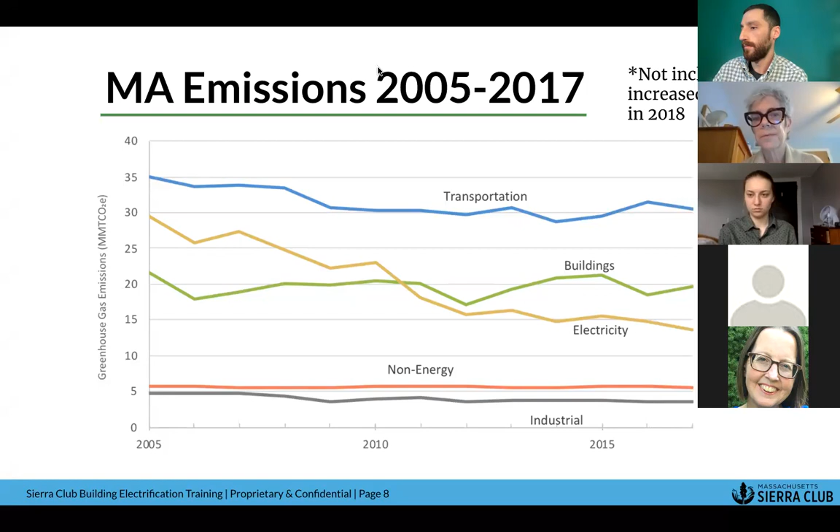The big takeaway is that buildings across the state of Massachusetts are the second largest source of emissions. Next slide, please. So why is that?

We're going to talk specifically in today's presentation on residential buildings and a little bit less so on commercial. In terms of residential buildings, the way people in Massachusetts heat their homes, primarily over 81%, basically 82%, heat their homes using fossil fuels of different kinds. The legacies around burning wood will continue to taper off, but electricity, in this particular graphic, is just over 15%.

So in terms of thinking about how to transform how we heat our homes, how we build our buildings, it's really useful to understand where we are starting from. And we're really starting from a place where fossil fuels dominate how people heat their homes.

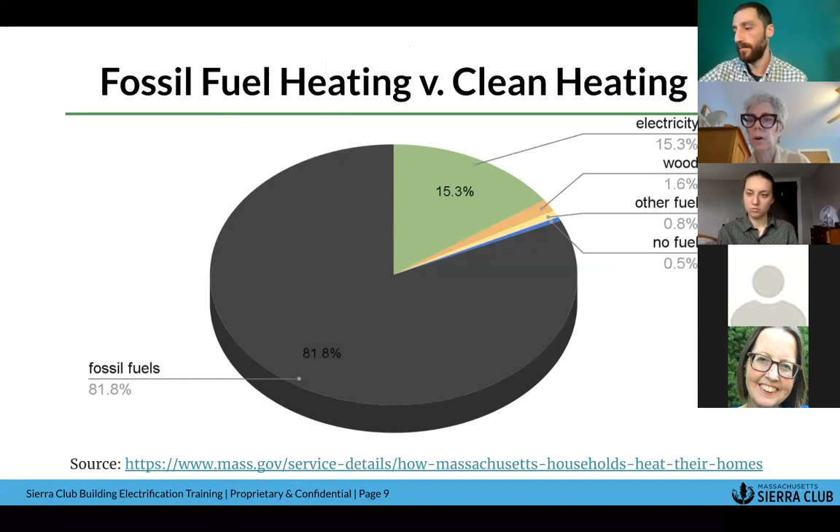Next slide, please. So what exactly is that heating profile for residential buildings? The majority of folks heat their homes with utility gas, Eversource, National Grid, over 51%.

Increasingly, however, even though we do have fuel oil and kerosene at around 27%, I have heard anecdotally from developers in central and western Mass that increasingly propane is being targeted as the fuel of choice for new development. So that's interesting.

So that is down there in the lower left, this bottled tank liquid propane option, 3.2% in this particular graphic, but we don't want it to expand in terms of its overall piece of the pie here.

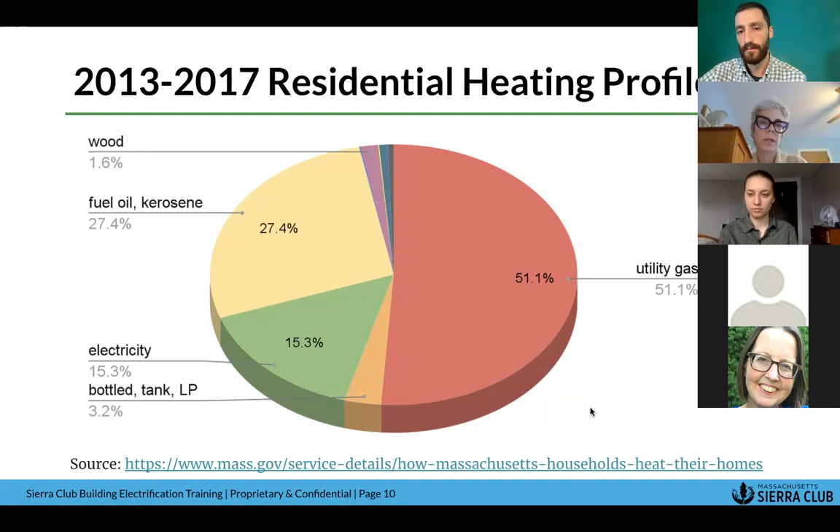And again, electricity only coming in at 15%. We really want to change the distribution of these profiles to really make sure that we have clean energy sourced for electricity. Next slide, please.

Massachusetts comes in just below Texas, whose major emissions are from cooling and transportation, and just above Minnesota. And we are only above Minnesota because we have more people. We're a densely populated state, and our residential heating profile is predominantly fossil fuels.

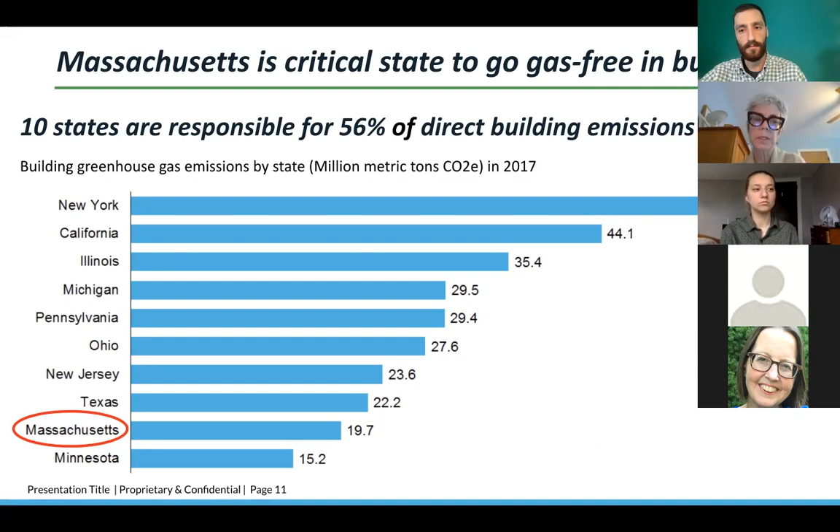So this is the larger context, both nationally and within the state of Massachusetts, of why buildings are part of the climate problem and how we can actually transform the building sector to contribute to climate mitigation. Next slide, please. So what do we mean by climate-friendly buildings?

As we have been already talking about, most of the buildings currently are heated by some fossil fuel or some non-renewable fuel source. The language around building electrification that Sierra Club is using here today really refers to the idea that instead of using fossil fuel to heat our homes, we can replace the infrastructure with all-electric, emission-free technology.

So building electrification specifically refers to switching out our appliances and making sure that they are all electric, everything from domestic hot water heaters - they've got to be replaced with other kinds of technologies - as well as our cook stoves. In Massachusetts, as I've been emphasizing, buildings are the second largest source of our emissions.

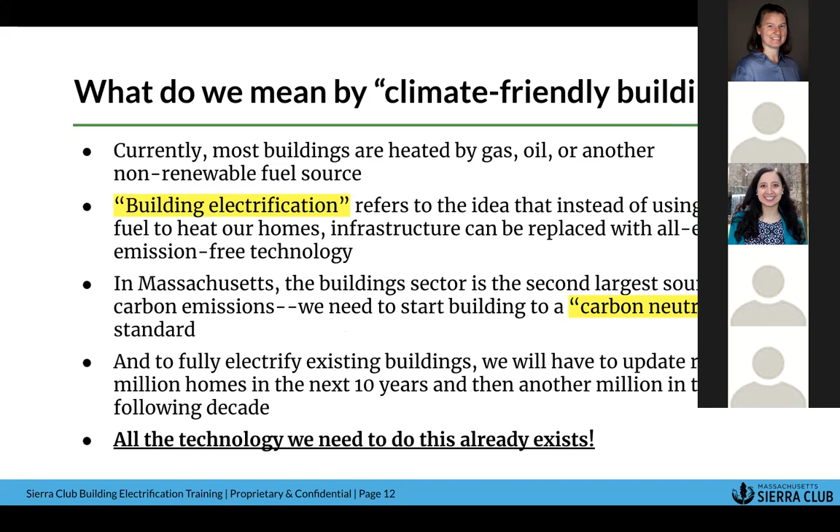And we really can use existing policy tools, existing regulatory tools to reverse this, to say buildings can actually be a major contributor to climate mitigation. And that's what we mean by carbon neutral.

So in order to fully electrify existing buildings, we will have to do an update, a retrofit, of almost 1 million homes over the next 10 years, and then after that first decade, another 1 million. This is a massive project.

So when we talk about building electrification, we're talking about new construction and retrofits. But the good news is we have the technology already to do all of this work.

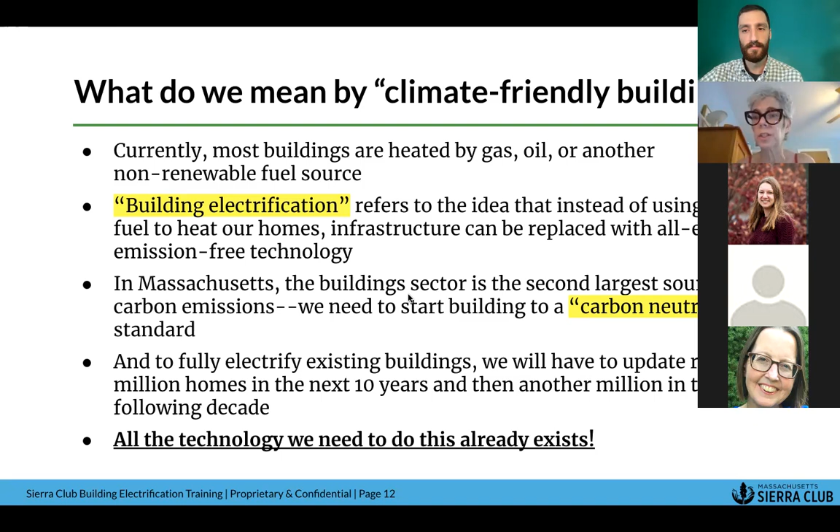Next slide, please. This just goes back to my last comment - this is a two-pronged approach. We have to address new construction, and we're going to talk about that, how we're going to address that through a statewide building code process called a net zero stretch code.

And then we also have to retrofit all existing buildings, not only residential, but commercial, industrial, labs, restaurants are really important, all towards getting to a fossil fuel free buildings sector. Next slide, please, Jacob.

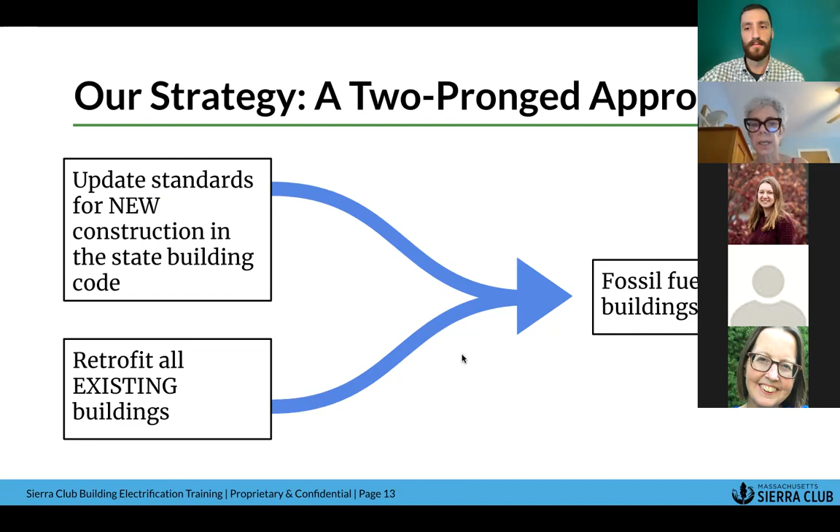So what is the problem with gas? I grew up with gas, I loved cooking with gas. For someone who cooks a lot, you can control the flame—it's really appealing, but it's a huge problem.

There are many aspects to touch on. Very broadly, natural gas has safety risks associated with it, including explosions inside people's homes resulting in death. There are also public health challenges, especially for folks with pre-existing asthmatic and upper respiratory problems, and persistent carbon emissions. We're really talking about trying to reduce carbon emissions within the building sector, and that starts in our homes.

So, the health impacts of fossil fuels in buildings. This was a study done by the Rocky Mountain Institute that I referred to earlier, where they looked at the air quality impacts of building emissions in Massachusetts for the year 2017. This is a snapshot in time, and for that particular year they calculated the number of early deaths—people who died statistically before expected. In the residential sector, they calculated 570 people died in 2017 alone.

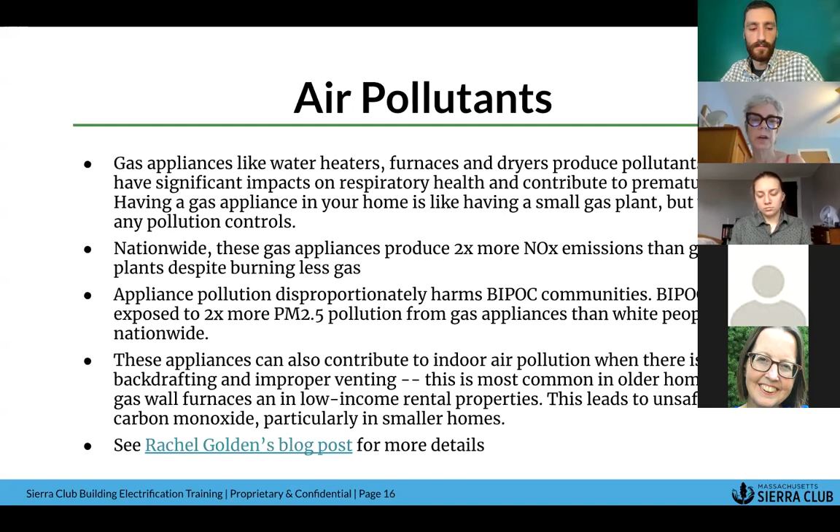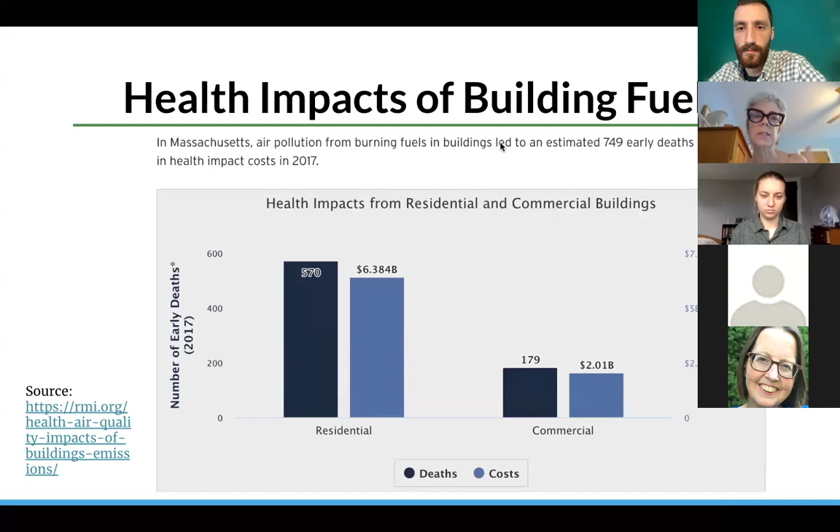So we've already done this slide, really getting clear on the health impacts now that we have this larger framing about the kinds of air pollution that is indoor air pollution generated by gas fired appliances.

The other safety risks are associated with explosions. For those of you who were around in 2018, there was excessive pressure in the Columbia gas lines that resulted in a series of explosions and fires in as many as 40 homes in Lawrence, Andover, and North Andover. In fact, one person was killed, and over 30,000 folks were forced to evacuate their homes immediately.

This doesn't happen very often, but it is a risk. And even though the Columbia Gas Company did reach a settlement of $80 million for these affected communities, these residents still live with the impacts of the explosions of their homes, as this image clearly demonstrates. Rebuilding, refinancing, and especially losing a loved one have long-term impacts. So gas is not safe.

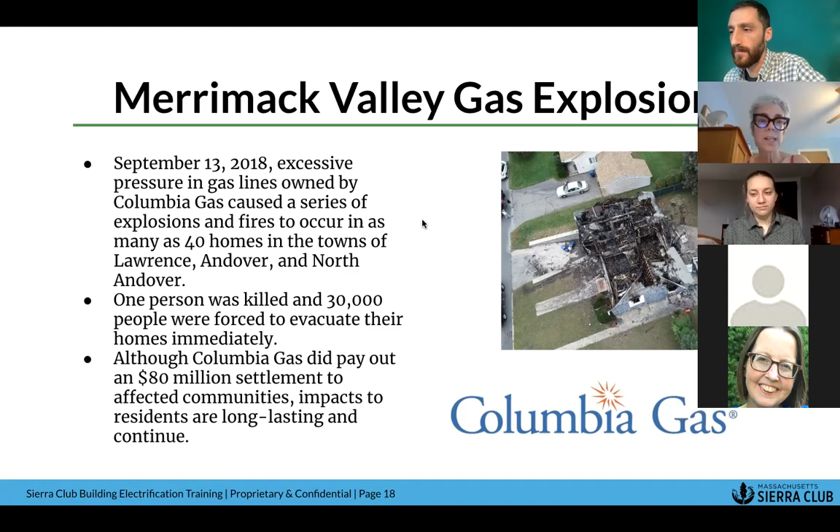Next slide, please. And in fact, as many of you know, gas is exacerbating the climate crisis. From a New York Times article in 2019, new data show that natural gas is the biggest driver of emissions globally in recent years. And if we want to get to net zero emissions by 2050, which is what the Next Generation Roadmap Bill now mandates, we have to specifically address natural gas in our buildings.

Part of the challenge is that gas companies connect at least one new house to gas every minute, totaling over 560,000 new gas hookups every year nationwide. So that's nationwide, but we're talking about Massachusetts. And another challenge is that the methane emissions from gas are part of the problem.

Methane is even a more potent and volatile greenhouse gas, and it is consistently underreported. So gas consumption across the United States, and these are 2018 data, show that buildings are just above industry and below power plants. So these are the three major sources: power plants, buildings, and industry for consuming gas.

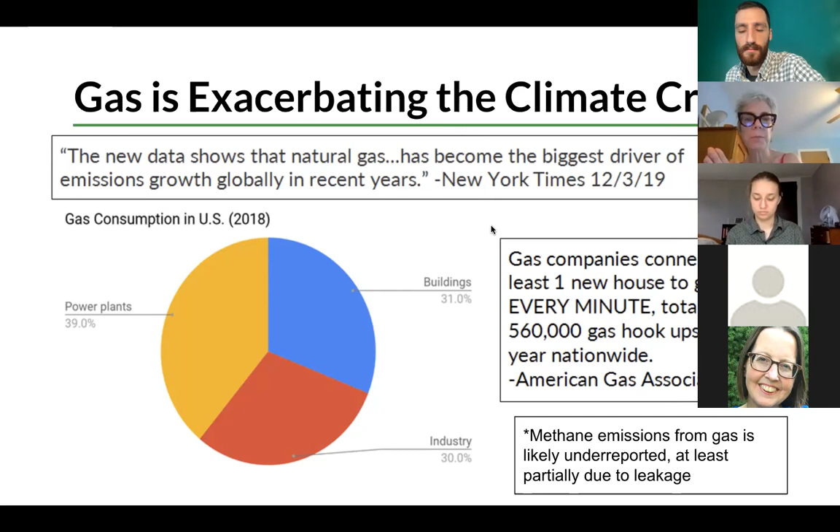That's why, once again, buildings are part of the problem now, but they can be part of the solution. Next slide, please. I do want to talk briefly about a technology that is gaining more mention in mainstream media, like the New York Times. And this is hydrogen, although oftentimes it's put in air quotes, green hydrogen.

Currently, hydrogen is used in all kinds of industrial processes. It does hold some potential for decarbonizing parts of our economy, related to energy storage, related to thinking about how to do long distance transportation for both ships and trucks. That's not part of the building sector. And then thirdly, in terms of manufacturing high heat, not part of the building sector.

There have been groups like the Clean Energy Group out of Vermont, and other groups that emphasize that there are so many unresolved challenges to truly understanding hydrogen and the risks associated with it, to make it currently a viable option for the building sector.

So for example, hydrogen is very volatile. It has a very different ignition profile. It behaves differently in fires compared to natural gas. So right now, there is not one firefighter in the state of Massachusetts that is certified to put out a hydrogen fire. And this relates to safety.

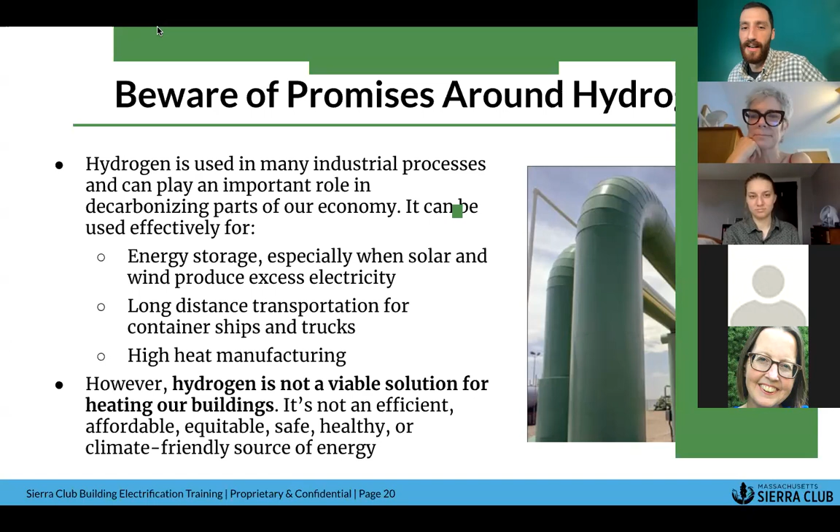But I'm going to move us along here. We're going to talk a little bit about what it means to electrify our homes and businesses, and what does a carbon neutral or net zero building actually look like?

So first and foremost, some of the benefits of electrification. We heard a minute ago about some of the downsides of gas. This is the other side of the coin. What are the benefits of electrification? There are more than this, but this is definitely the short list here.

Affordability is probably the one that comes first to mind. If you aren't paying a gas bill, that's one less utility bill to pay, which means more affordability in the long run as electricity prices continue to drop with offshore wind and additional solar coming online. That's going to mean lower monthly bills for residents.

Certainly not burning gas and switching to emission-free electric heating is great for the climate crisis. I think we covered that. Likewise, Sarah really did a great job talking about some of the health and air impacts of not burning fuels in your home. Maybe unintuitively, really efficient homes are some of the most dangerous homes to burn gas in because there's not enough airflow. So ideally, we want really efficient homes that are really cheap to heat, but then are heated with emission-free, pollution-free technology.

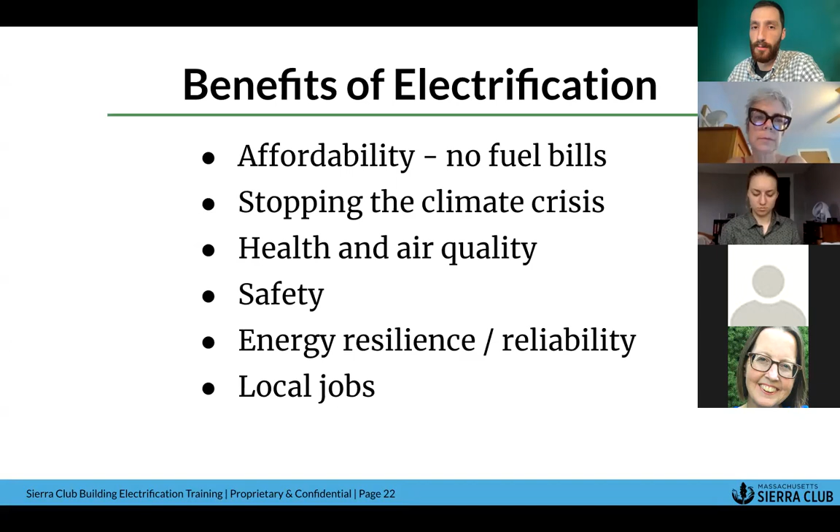So before I move into some of the nitty gritty here, I just want to talk for a second about equity. Anytime we're proposing a change in our economy, a change in the way we do business, it's really important to think about who is being impacted, and especially how the most vulnerable residents are impacted by such a change. From Sierra Club's perspective, we believe it's very important that we move low-income residents off of gas first.

Otherwise, they will be saddled with the cost of a shrinking system. Basically, we anticipate that electric heating will continue to become cheaper and cheaper, while gas heating will become more expensive. We have a climate bill right now that basically mandates us getting off of fossil fuels and moving to emission-free technology. If low-income residents are the last ones still using gas, they'll be paying for all that transmission and all the infrastructure related to the gas system beyond just the cost of gas in their homes. So really making sure those are the folks who have the benefits first is really important.

And also from an equity perspective, we want those folks who have less means to have smaller bills and be able to afford their living situation.

What we advocate for is for communities who are looking at pilot projects or something more expansive soon to partner with your local affordable housing, labor, and other equity groups to figure out how you can build a program in an equitable way. I think the things that we all really want to avoid are updating a house to make it really efficient and use all clean heating technology, and then displacing the residents, either because their landlord kicks them out to do the upgrade, or they can't afford the rent.

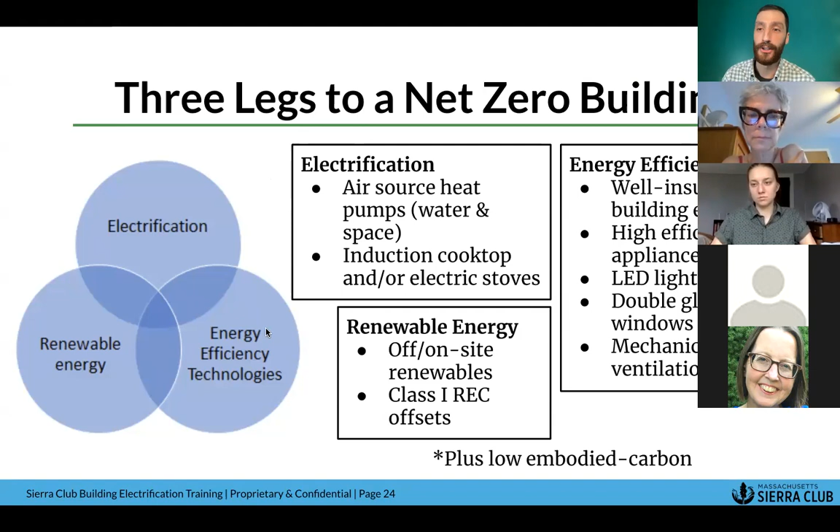I understand where that's coming from. They do work, and they don't pollute like a gas stove. I've had a lot of fun researching induction cooktops and heard some really exciting stories about how that technology is developing. We're not going to talk much about cooktops in this presentation, but happy to connect with folks offline and talk about cooking. And the last thing is renewable energy. Of course, we want to be building buildings that have on-site or off-site renewables.

So I think the short definition here is very simple. We want a building that is using very little carbon to operate, and also what little carbon it is using is being offset by a renewable generation. Ideally, a building will also be built with very low embodied carbon, so thinking about the building materials that we're using.

Sarah, I guess I was going to toss it to you for just a minute here if you wanted to say a few words about embodied carbon.

Great, thanks, Jacob. So embodied carbon is gaining a lot of traction in the building and design fields as something to include in our conceptualization of a net zero building. As Jacob mentioned, the very first thing to do is to make sure that if we want a building to be truly net zero, we really maximize the structural efficiency, make sure that building envelope is tight. And in doing that, really focus on using, if it's a concrete building, low carbon concrete mixes. There's a lot of work happening right now in that area.

Limit the use of carbon intensive materials, and there's a long list if folks are interested that I can send you about what those materials are. More importantly, reuse existing materials, choose materials that have lower carbon involved in its sourcing and production, and minimize the waste. It's really trying to recycle, reuse, and minimize waste, but it all starts with really maximizing the structural efficiency of a building.

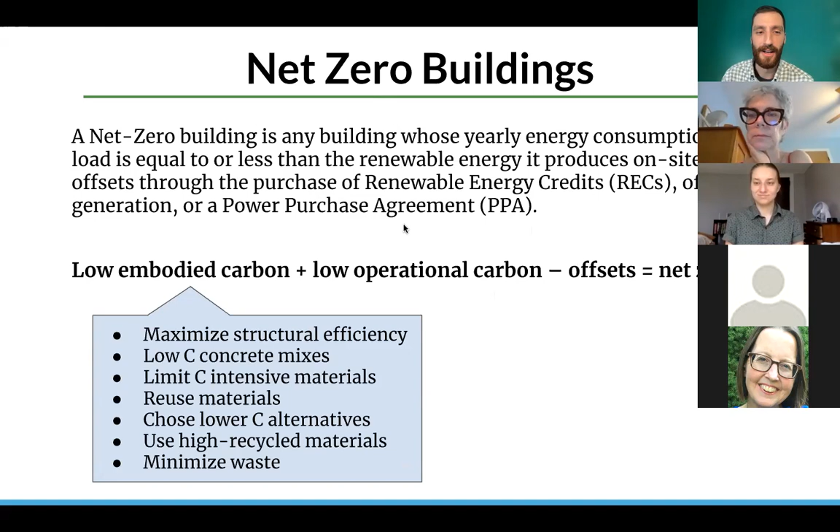Thanks so much, Sarah. Sarah is definitely, by comparison to me, the expert on embodied carbon, further along the learning curve. So I'm going to very briefly show this video. I'm assuming this will be review for some folks, but it's just about a minute and a half. A question I often get is, how does this technology actually work? Hopefully this very short video will answer those questions. If you all bear with me one second here.

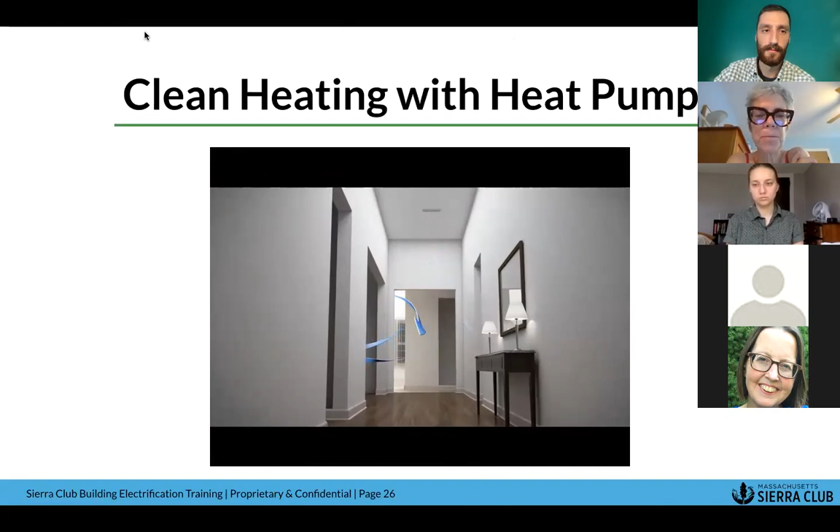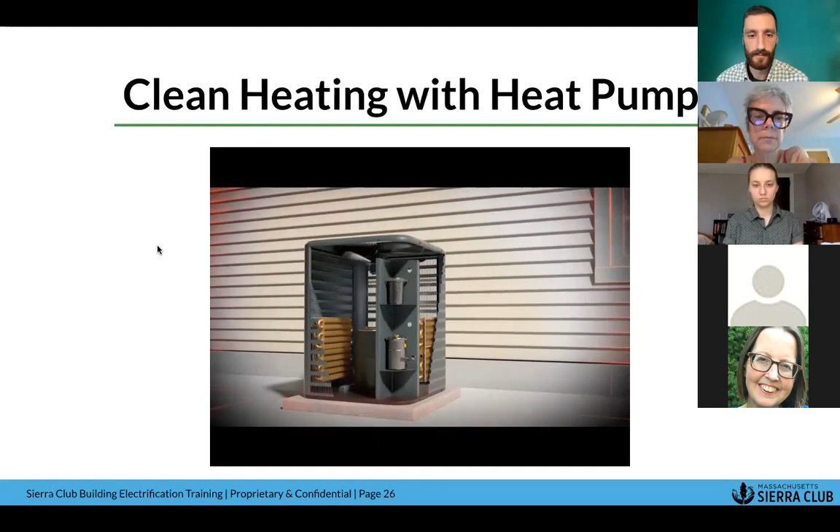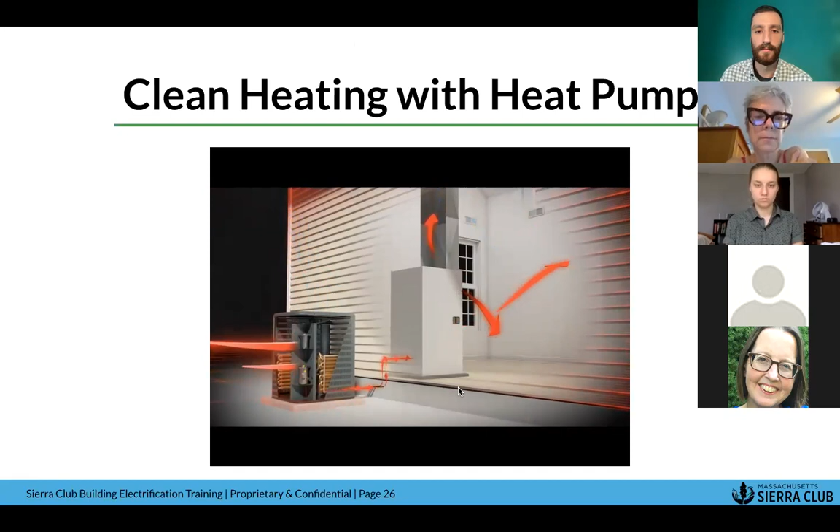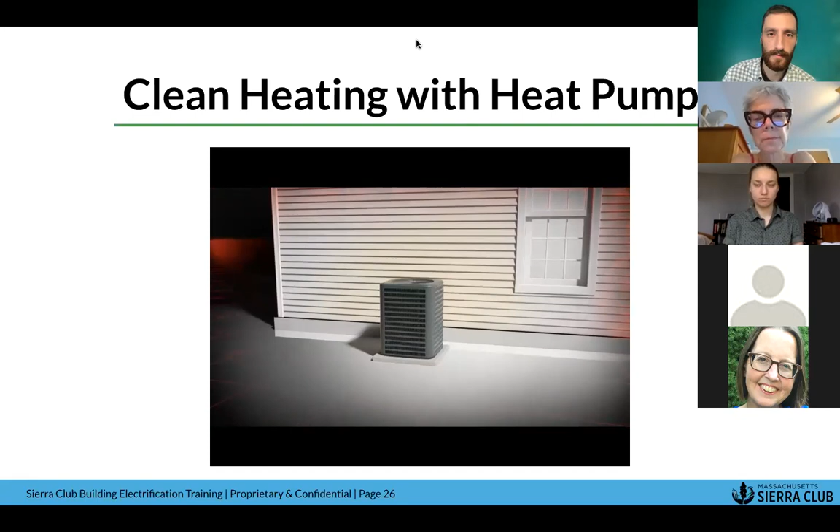Heating and cooling your home accounts for more than 50% of the average monthly utility bill, so it's important to make smart choices when considering a new heating and cooling system. A heat pump is the most efficient heating and cooling system available today. That's because rather than generating heat, a heat pump simply transfers heat from one place to another, a much more efficient use of electricity. Here's how it works. A typical air source heat pump has an outdoor unit containing a compressor and condenser that work in conjunction with your indoor air handling unit. In the warmer months, a heat pump pulls heat from inside your home and transfers it outside, cooling your home much like an air conditioner would. In the cooler months, it reverses the process and extracts heat from the outside air and transfers that heat into your home. Even on cold days, the air contains enough heat to warm your home. However, on extremely cold days, a heat pump has an electric resistance heating element which can be used to provide auxiliary heat. In addition to the air source heat pump we've reviewed, geothermal and groundwater heat pumps use similar technology. All work under the same principle of transferring heat rather than generating heat. It requires less electricity and saves you money. Smart energy, smart choices.

You all get the picture with that. It's a Mississippi Power video. I'm sure I don't agree with some of the other work Mississippi Power is doing, but it's a great heat pump explainer. So I'm going to move on. Hopefully that answered any lingering questions folks had about the technology. I want to also be clear that the sales of heat pumps have been increasing year after year, and I believe 2020 was the first year that heat pump sales actually exceeded gas furnace sales. So the trend is absolutely there. The technology continues to improve, and the number of businesses who specialize in heat pump technology are also increasing, making it easier and easier to get maintenance and good installation or contractors.

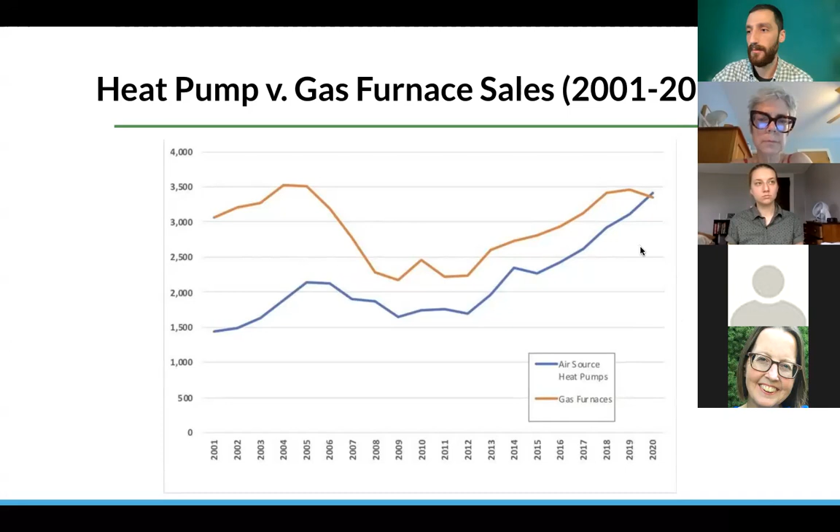So what does an energy efficient net zero home look like? It looks kind of like this, a lot like a normal home, but with tight air sealing around the windows and doors, Energy Star windows, LED or Energy Star lighting, great insulation in the attic and in the basement, high efficiency appliances - that could be your heater, as well as your washing machine, dryer, fridge, stove, and all that. And the last piece of the puzzle is renewables, so ideally on your roof, but perhaps on a different roof, and you're able to draw power from a neighbor community solar farm or something similar.

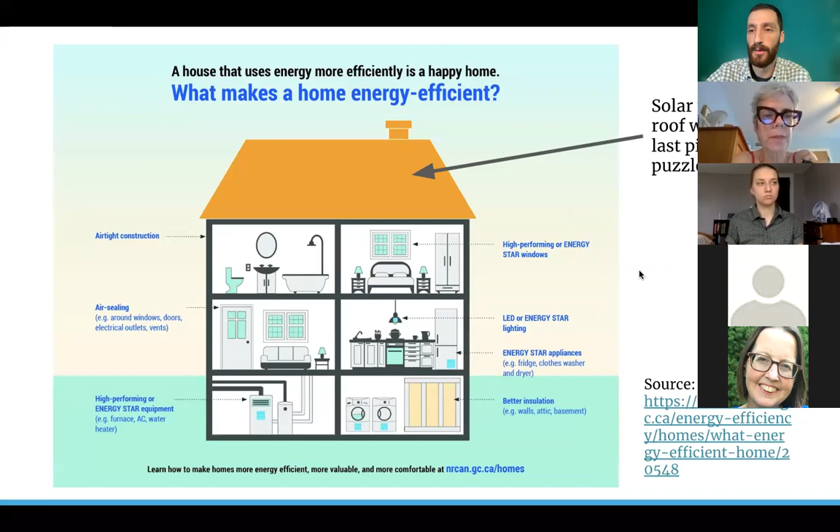So, and some of the challenges—we want to be really honest about the challenges here, because there are quite a few, and they're different for new construction than building retrofits.

In the case of new construction, the biggest challenge right now is cost. In some cases, the cost differential to build super efficient net zero buildings is almost identical to building a more traditional building. In some cases, it could be as high as 7 or 8%. The average payback period is about 12 years, but in many cases it's much better than that, and the trend has been improving year to year as the technology improves.

Creating opportunities for folks to get access to financing to do this type of building is really important, and something we're going to continue to advocate for at the state level. It's also important to factor in the non-financial benefits of carbon neutral buildings, which we've talked about quite extensively.

There's also a time of transition we're expecting where electricity bills may actually increase before they go down. We want to be careful and mindful that we're not having any undue impacts on our most vulnerable residents. And, as I'll say a bit more about in a moment, the workforce is still developing around this, and in many ways this technology is still new. So compared to gas or oil heating, which has been around much longer, there is still limited expertise in some areas, although it's growing year after year.

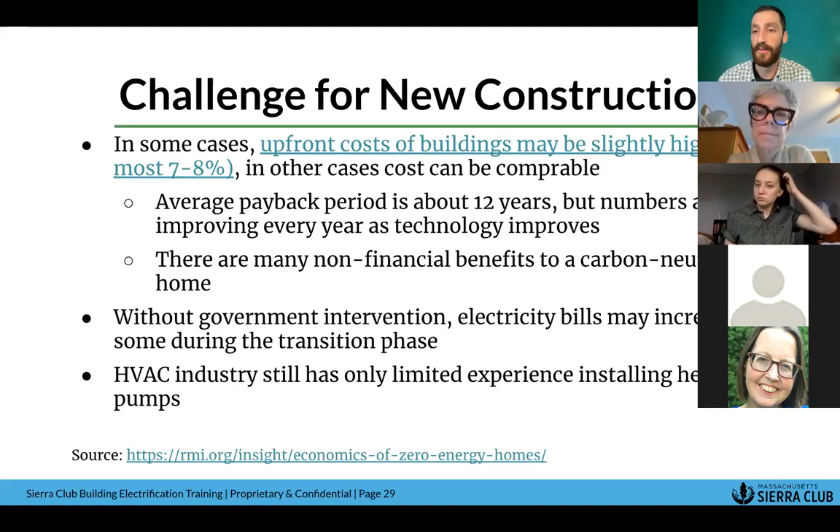By comparison, there are very similar challenges for building retrofits, a little different. In terms of our current housing stock in Massachusetts, it's very old—I've lived many years in a leaky 100-year-old apartment. Those are going to be some of the hardest buildings to retrofit, because not only do you need to replace the infrastructure and outdated wiring, but it's going to be very hard to make those buildings efficient again.

So again, I think the secret there is we should focus on the folks who are in most dire need first.

I mentioned the lifespan of fossil fuel heating appliances, which is 15 to 30 years. Basically, that means anything built essentially now, but certainly by 2030, will still be in operation by 2050, when we know we need to transition away from fossil fuels entirely.

We talked about the workforce a minute ago, and I'll also say that in environmental justice or low-income communities, these issues are often compounded. The housing stock in many cases is of poorer quality, and there's already higher pollution and utility burden. So there are definitely communities that face a higher challenge in all regards to retrofitting their buildings.

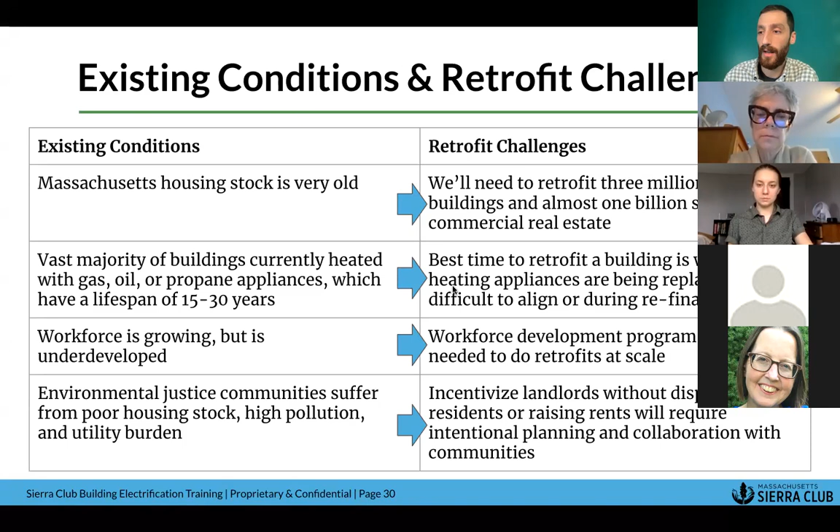I'm also going to speak very briefly about some of the opposition to building electrification. Groups like the Mass Petroleum Council have publicly praised climate goals but continue to lobby for fossil fuel policies. And we saw recently groups like NAIOP and other developers speak in favor of the recent climate bill, but against some of the provisions around buildings.

And in many states other than Massachusetts, Republicans are acting proactively to pass laws to prevent transition away from gas in the future.

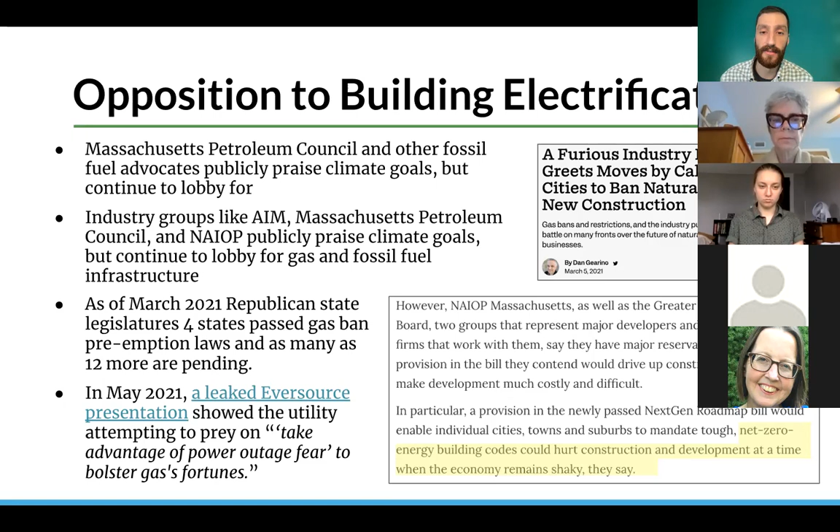So I share this because, as municipal leaders, you're going to be hearing from constituents and from the industry with very similar talking points, and we want you to be prepared to push back both around cost and reliability.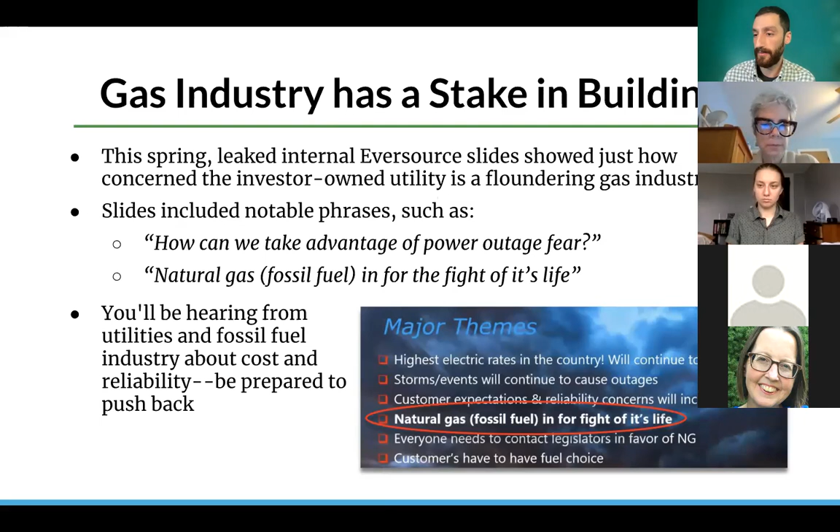In many cases, gas is not more reliable or more resilient, and in many cases the electric option actually is better.

Especially in areas, especially in homes where there is access to on-site renewables, it's much more resilient for big storms, for natural disasters, and other things.

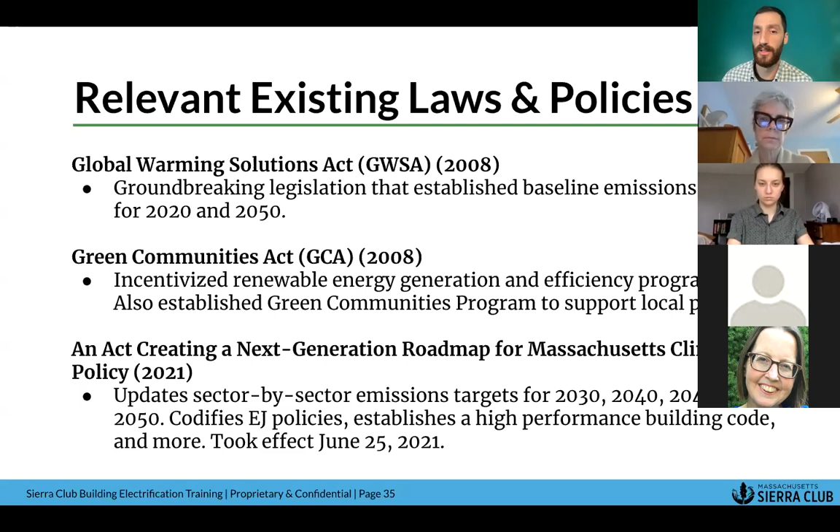And Sarah, am I tossing this one to you? I forget where the transition is here. I think it's here. Great, thank you, Jacob.

I think what's interesting, what happened with the negotiations between Governor Baker and the legislators around the climate bill, in some ways focused on the building code provision in the bill. I just want to offer a broader context for why building codes can be really powerful for affecting change in the building sector.

Right now in Massachusetts, we have two existing codes. The first, the base code, is the floor. This provides the minimum requirements for all new buildings related to safety and things like that. Then there is the current stretch code, that basically operates as the ceiling. If you're a green community, you probably have a stretch code where you can adopt a more stringent code that has additional requirements for energy efficiency.

So in Massachusetts, the challenge has been that our base code, which is the floor, and our stretch code, which in theory is supposed to be the ceiling, because we've updated the base code, now we're looking at the floor being above the ceiling in terms of the actual existing code language. So that means a couple of different things.

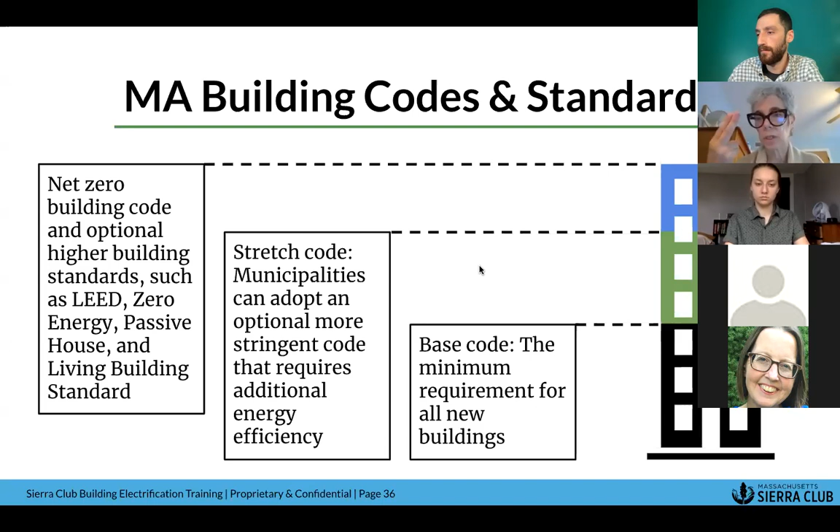So it's going to reverse that relationship between the base, the floor, and the ceiling, so that the floor is actually the base code now, and the net zero stretch code is going to have increased emphasis on efficiency, on electrification, and flexibility around where that renewable energy piece is procured, whether it's on-site or purchased off-site. Over time, there is a process for continuing to update and align and reduce these building codes back down to 2. So next slide, Jacob.

We do want to emphasize that there are a lot of voluntary certification programs out there. There's LEED, leadership in energy and environmental design, there's Zero Code, there's the Living Building Challenge. But with all of these, many of them do not really pivot buildings to be fossil fuel free. That's really what we're trying to do with the net zero stretch code, with building electrification. We want to emphasize that these certification programs exist and can be useful, especially for marketing purposes. But at the end of the day, the biggest, more powerful way to push for a statewide approach to building electrification is through a net zero stretch code process that focuses on embodied carbon, operational carbon, and integrates where buildings, both commercial and residential, can get their renewable energy.

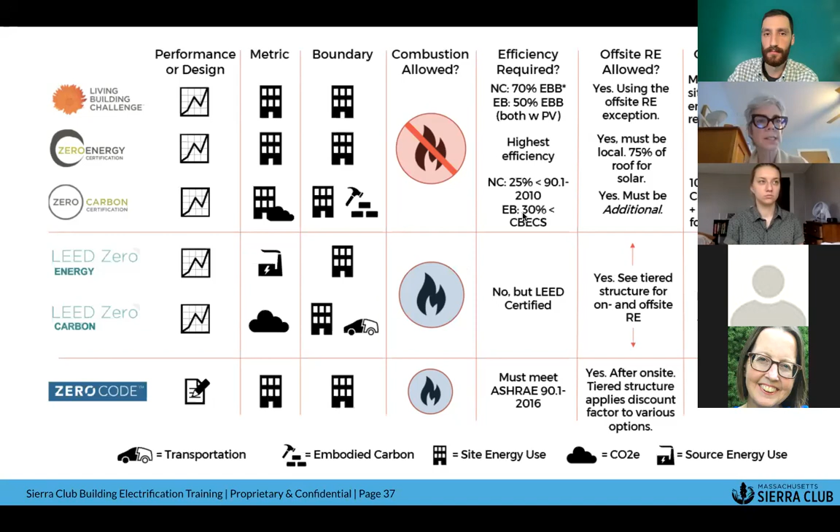Next slide, please, Jacob. I think this one's back to me. Correct. So I'm just going to talk for a second about where Massachusetts fits into the broader scheme nationally, and I find this really interesting. Massachusetts is one of the states that's actually leading on these policies nationally. A lot of states are simultaneously trying to figure out how we change our building sector, and Massachusetts is one of them. California, other New England states, Pennsylvania, DC, a couple others are definitely all working through some of the same challenges as we are. I think Massachusetts has a really unique role, though, because we are a slightly colder climate state, because so many of our buildings are heated by gas.

Some of the policies and local solutions that we pursue are going to be mimicked in other communities across the country and possibly in other countries as well. I just want to share that this is some smattering of news coverage from across the country, just to show that this idea is gaining steam quickly and will continue to be part of the national policy conversation, increasingly so moving into the current decade.

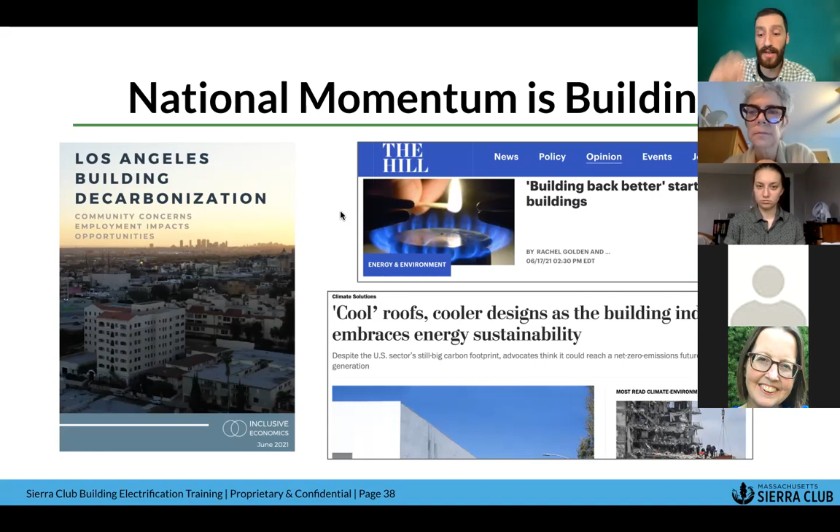In terms of just some specific examples of other states, I won't run through these in detail, but this is all policies that have passed in the last 2 years in California, Colorado, and Connecticut. Both the Colorado and the Connecticut examples were this year, in fact.

States are right now, there's a few different things we're seeing at the state level. States are seeking to get a better sense of where their building emissions are at, measuring how much their buildings are producing, especially commercial buildings. We're also seeing states like Connecticut establish pilot programs for energy efficiency and weatherization, and creating funding streams for communities to take advantage of these programs and bring some of those benefits to their residents. So it's really interesting. Massachusetts has many pending bills that we won't have time to talk about today, which do a whole wide variety of things. I just want folks to be aware this is out there.

And Gordon, to your question in the chat, we will cover the timetable for the high performance code development before we close today. And Sarah, I really appreciate the quick answer in the chat as well. But we'll talk about that, that's one of the last things we're going to talk about today.

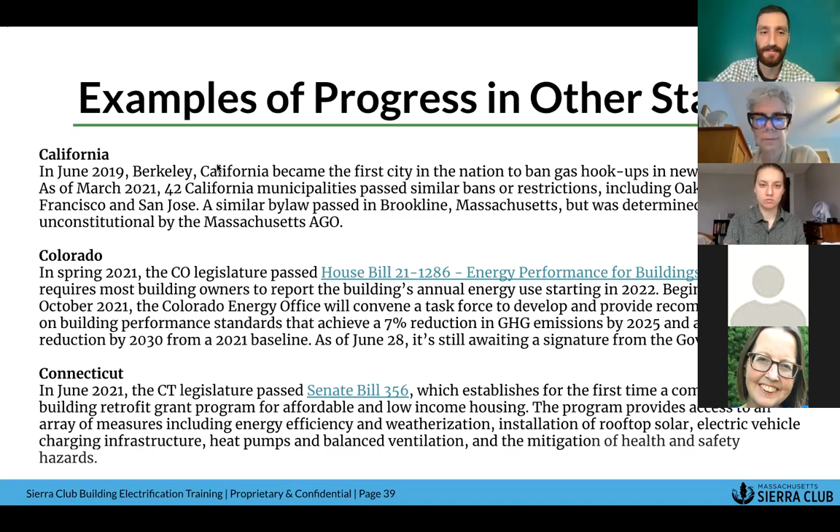So we have about 30 minutes left. I think we're going to try and spend maybe the next 15 or so minutes in breakout rooms, though. I really want to give folks a chance to chat with each other. One piece of feedback that we got from past similar events is that folks just really want a chance to explore and talk about these ideas together. We've thrown some prompts here that I'd love folks to take a look at around what are the challenges you foresee in your community, what are some of the opportunities, and what state policies would be helpful and what tools can we provide.

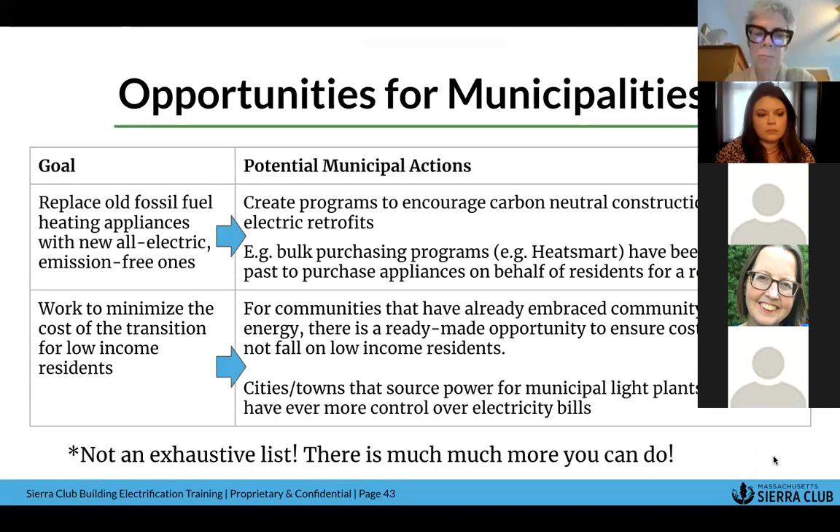But in addition to that, you all, I think, often know what's best in your communities, places to push. But broadly speaking, some of the things we advocate for are incentive programs. Heatsmart isn't something the state provides any support for anymore, but we've still seen communities toy around with doing bulk purchasing programs for heat pumps for residents. Other programs encourage carbon neutral construction — I know Newton, Cambridge, Arlington, and Brookline are doing some really creative things to try and encourage a higher standard of fossil-free construction. So I just want to encourage folks to play around with that.

If folks want to be in touch with people in communities that are playing around the sandbox, I'm happy to make that introduction. I know there are some folks here on the call who are really engaging in that.

The other thing is I really encourage folks to think about how to minimize the cost of this transition to low income residents. We'll really be leaning on some of your expertise about how we can make sure that utility bills aren't highest for folks who can least afford it.

If you are a community choice energy town, or you have a municipal light plant, you potentially have quite a bit of control over electricity rates, certainly more so than most communities. So there's kind of a built-in mechanism there that I encourage folks to play around with, and hopefully we'll have some best practices to share at a future event.

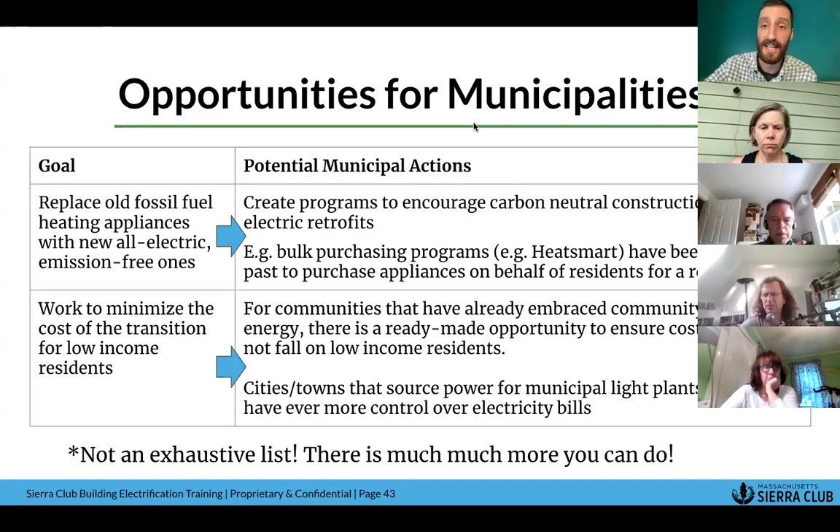I'm going to spend just a minute now talking about statewide advocacy. This was kind of one of the intentions behind convening this event today, because we see a number of opportunities coming up at the state level where your voices are going to be really helpful, whether you're a city councilor or a select board member or on an energy committee or a staff member.

Municipal voice is going to be heard loud and clear around the building code process we mentioned, to create a net zero stretch code, as well as the update to the Mass Save 3-year plan, which some of you are probably already aware is ongoing. We are continuing to offer input into that process to make it a more equitable program, as well as one that does not incentivize fossil fuels in the future. And there's a bunch of other regulatory processes happening, I'll mention very quickly in a second here.

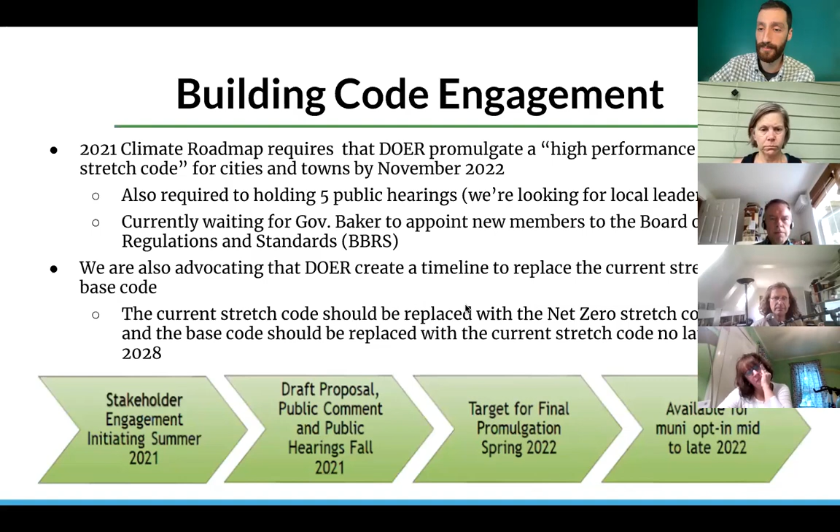I hope to have it today, I don't have it today, but I'm hoping I'll have it maybe next week. In terms of the Mass Save 3-year plan, we are working with the Green Justice Coalition and Clean Water Action on a sign-on letter for municipal leaders to advocate for metrics for how Mass Save is serving historically underrepresented communities. We haven't really had good data on that, and the anecdotal data we do have is that Mass Save typically serves middle or upper class white communities more often than not. So getting that data is the first step to a more equitable rollout of these incentives.

But we also want to make sure that we're not incentivizing fossil fuels, and this is an ongoing conversation as well. So stay tuned, we're going to have a sign-on letter we'll share with you all. When it comes out, feel free to crib it for talking points if you want to use it. If you just want to sign on, send it around your community, that will be helpful as well. But again, municipal voices are so important here.

I don't think I have time to get into this too much, but a few other things are coming up. There's the Governor's Clean Energy and Climate Plan, which will implement many parts of the climate roadmap bill. We're expecting public meetings this fall or winter around the 2025 and 2030 emissions targets. Sierra Club and our allies, MCAN and others, will be trying to hold the administration's feet to the fire.